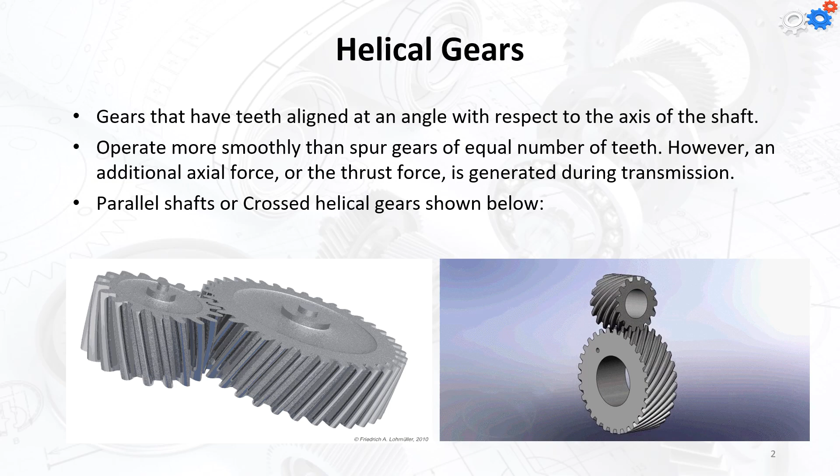So the helical gears are going to have a smooth and quiet operation due to the gradual tooth engagement. You remember that the straight teeth in the spur gear are going to have a complete engagement every time, and that's what actually causes the noise at high speed. The gradual engagement of the teeth is going to lead to a smoother operation.

The spur gears are limited at high speed due to the impact, while the helical gears are good for speeds in excess of 5,000 feet per minute. They can withstand a large capacity of up to 30,000 horsepower. More tooth engagement allows for greater power transmission for a given gear size. Parallel to perpendicular shaft arrangement are possible.

The disadvantages: they are more expensive because the manufacturing process is going to be more expensive. And the resulting axial thrust component is also one of the disadvantages because this will affect the shaft, the shaft design and the shaft material property.

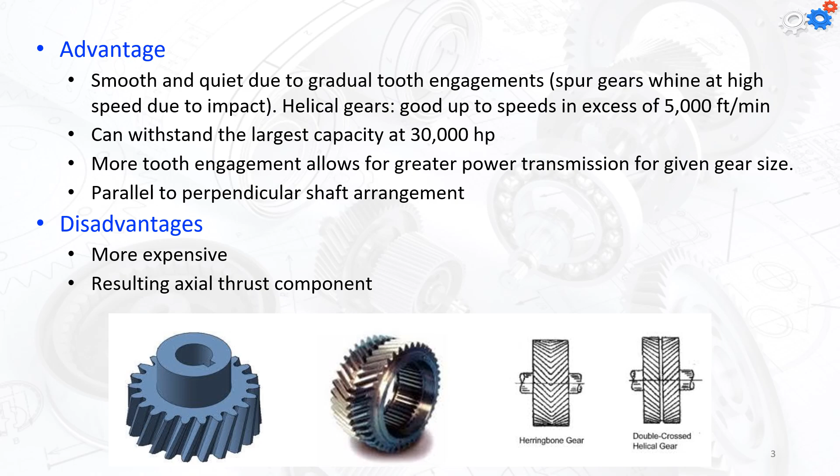So we remember that in the spur gear we have what we call phi, which is the pressure angle. Now here we're going to have an additional angle, the helix angle. The helix angle is typically in the range of 15 degrees to 45 degrees. The circular pitch p is going to be equal to pi D divided by N as usual.

The normal circular pitch, Pn, is going to be equal to p multiplied by the cosine of the helix angle. The diametral pitch is N over D. The normal diametral pitch is going to be Pd divided by the cosine of the helix angle, and the axial pitch is going to be equal to p divided by the tangent of the helix angle.

So you can see now from this diagram, we're going to have the radial force, the tangential force, the axial force, and the normal force is going to be the sum of all. So the axial force here is actually an advantage and disadvantage at the same time.

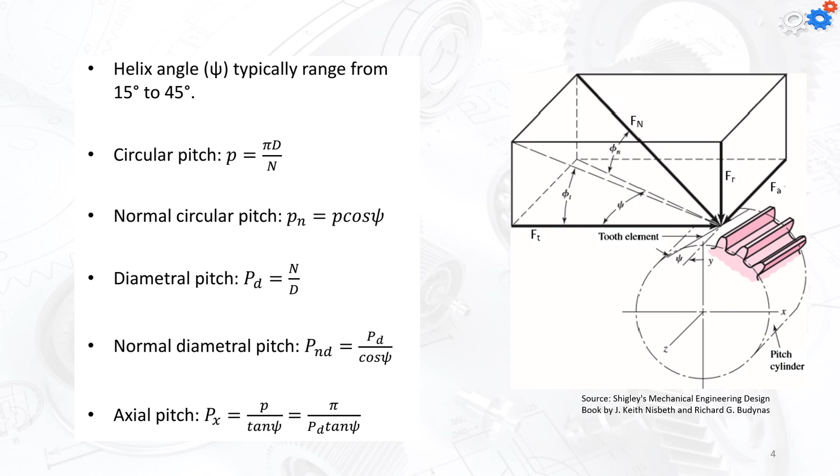So we will go through the design procedure for the helical gears. Once again, we are going to go through the different equations, and then we're going to summarize that in a step-by-step procedure that you can follow to solve the example for this topic. So let's discuss the forces applied in the helical gears.

We have Wn, which is going to be the true normal force that acts perpendicular to the face of the tooth in the plane normal to the surface of that tooth. So what we mean by that: that's the face of the teeth, and you can see that the normal plane is going to be this one, and the force Wn is going to be perpendicular to the face of the tooth in that plane. So this is the normal plane, this is the normal force.

So what you can see is that it is going to be inclined by the normal pressure angle, phi n, and then we have the helix angle. The helix angle is the angle between the two planes here, the normal plane and the force, and we have the tangential force.

Now the normal pressure angle is phi n, the transverse pressure angle is phi t, and the helix angle is given here. Now for the helical gears, the helix angle and one of the other two are going to be specified. The third angle can be computed from the equation: tangent of phi n is equal to tangent of phi t, the transverse pressure angle, multiplied by the cosine of the helix angle.

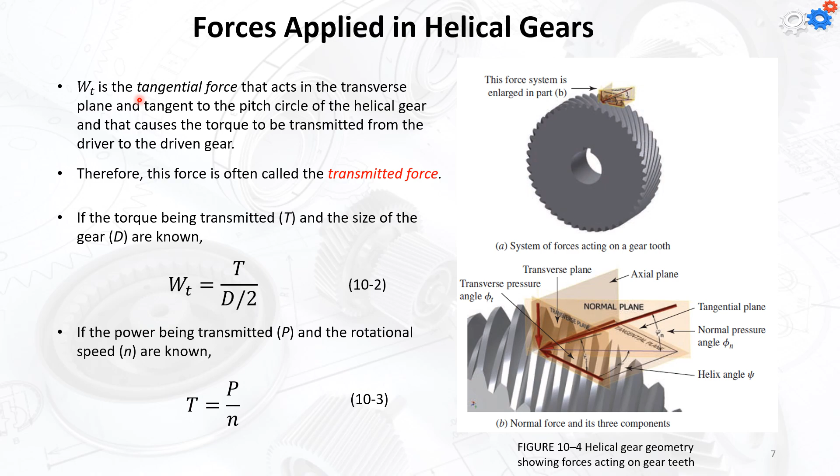So we can summarize the power, torque, and the forces relation. The box to the left is going to be for the US units system, and the one to the right is going to be the power, torque, and the forces for the SI metric unit system. So for the US unit system, or the IP system, we bring the concept and the equations from section 9.3 in the book developed for the spur gears and apply them for the helical gears. And these are going to be unit specific equations.

So when the power P is expressed in horsepower, the rotational speed is going to be in RPM, and the diameter D is going to be in inches. So the torque is going to be equal to 63,000 multiplied by the power in horsepower divided by the N in revolutions per minute. And we're going to get the torque in pound-inch. The pitch line speed, or the Vt, is going to be pi d multiplied by N divided by 12, and this will be in feet per minute.

And the tangential force Wt is going to be 126,000 multiplied by the power divided by the RPM multiplied by the diameter. And finally, the Wt can also be found directly by multiplying 33,000 by the power divided by the Vt, because we simply replace pi dn divided by 12 with Vt in this equation, and we get a new factor for the multiplication.

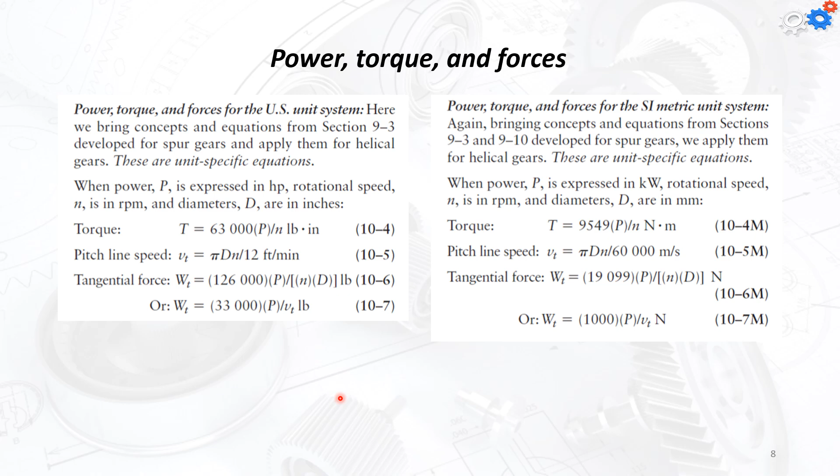And the tangential force is going to be 19,099 multiplied by the power in kilowatts divided by the RPM multiplied by the diameter in millimeters. Or, the same way, it is going to be equal to 1,000 multiplied by the kilowatts divided by the Vt in meters per second.

Now, after finding the tangential force and the normal force, we can use the transverse pressure angle, phi t, to find the radial force. So Wr is the radial force that acts toward the center of the gear perpendicular to the pitch circle and to the tangential force. It tends to push the two gears apart. Wr is equal to Wt multiplied by the tangent of phi t.

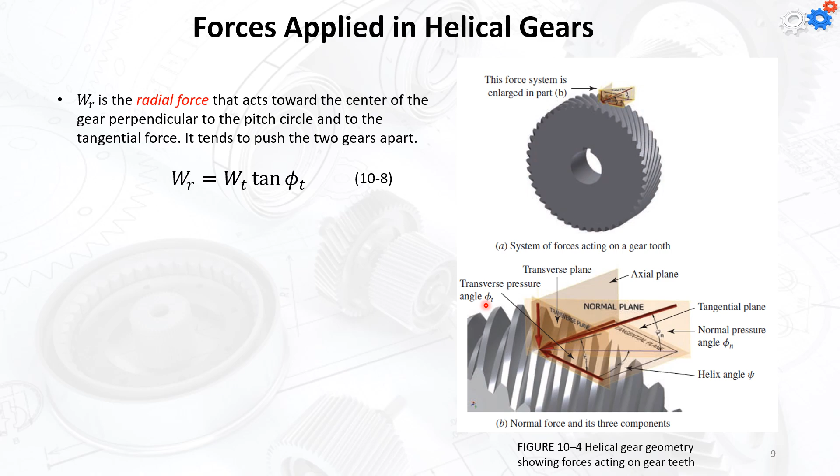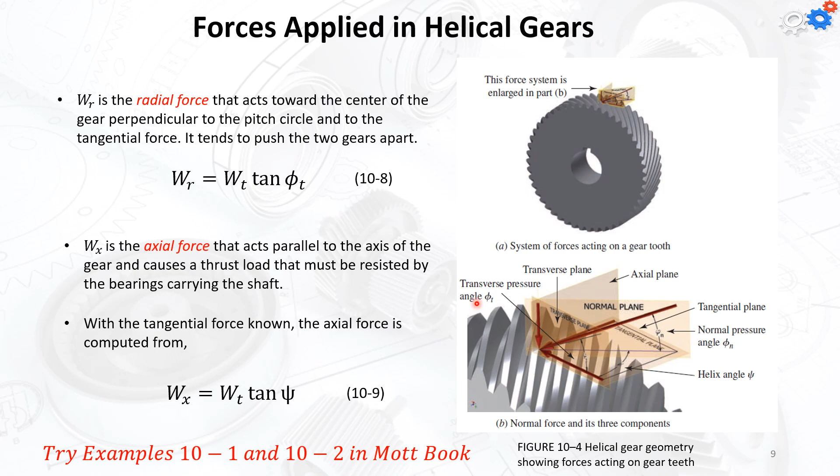Now, Wx is the axial force that acts parallel to the axis of the gear and causes the thrust load that must be resisted by the bearings carrying the shaft. With the tangential force known, the axial force can be computed from the equation Wx is equal to Wt multiplied by the tangent of the helix angle. You can try example 10.1 and 10.2 in the Mott book as an exercise for finding the forces by using the equations that we listed here.

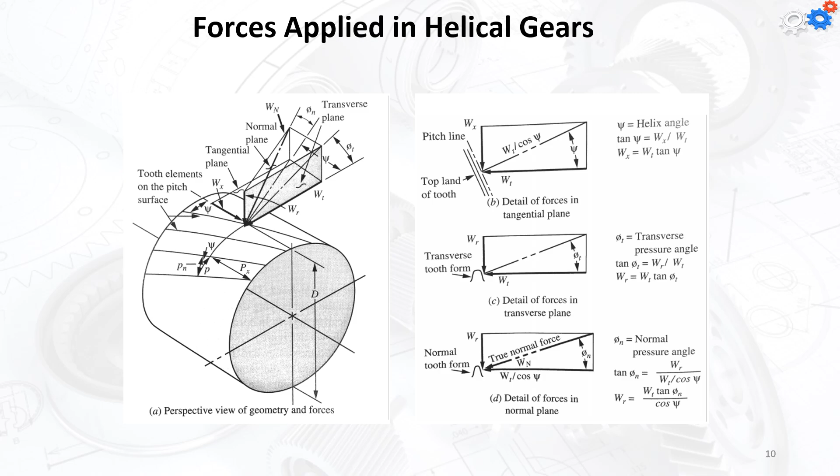So now we are ready to go for the next stage, which is going to be the design procedure. Before that, we are going to continue to find the parameters required for the design procedure, which is mainly going to be about finding the stresses exerted on the gear. So for helical gear design, everything is essentially going to be the same as what we have for the spur gear. The fundamental difference is going to be using the J and the I factors.

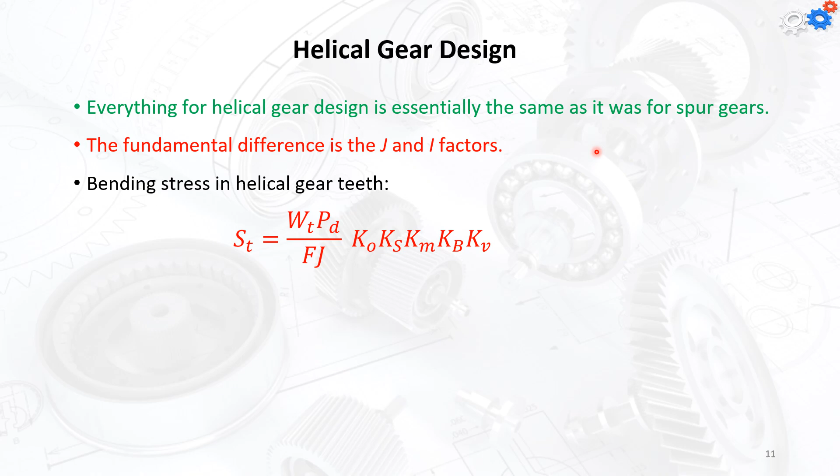The bending stress in the helical gear teeth is going to have a similar equation to the one we had earlier. So it's going to be Wt multiplied by Pd divided by F J, you remember it was I earlier, multiplied by the factors Ko, Ks, Km, Kb, and Kv. The overload, the size, the material, and other stuff. So Ko is the overload factor for the bending stress.

Ks is going to be the size factor for the bending stress from table 9.2. Km is the load distribution factor for the bending strength. Kb is going to be the rim thickness factor. And Kv is going to be the dynamic factor for the bending strength. And J is going to be the geometry factor, and this can be found from figure 10.5 and 10.7, which we are going to present to you soon.

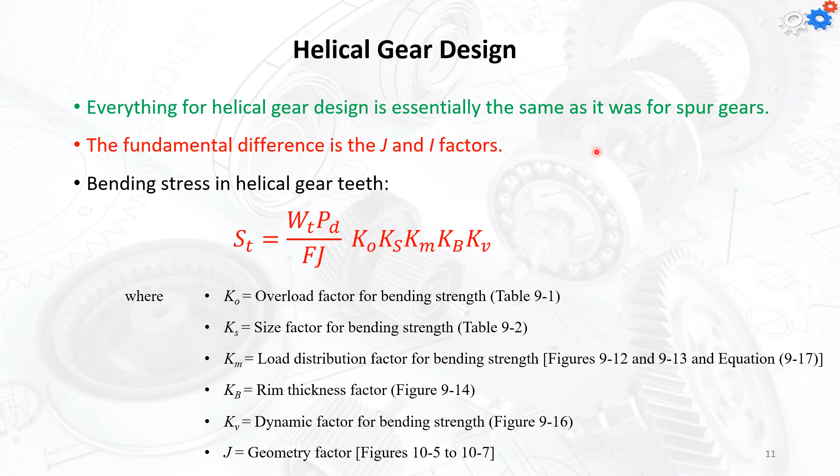So again, we have the number of the teeth in the mating elements and the helix angle. Once again, we make the intersection, then we can find the value for the K factor or the modifying factor. In case the phi n, or the normal pressure angle, is equal to 20 degrees, we can use figure 10.6 and the same procedure to locate the value for the geometry factor J and for the modifying factor K.

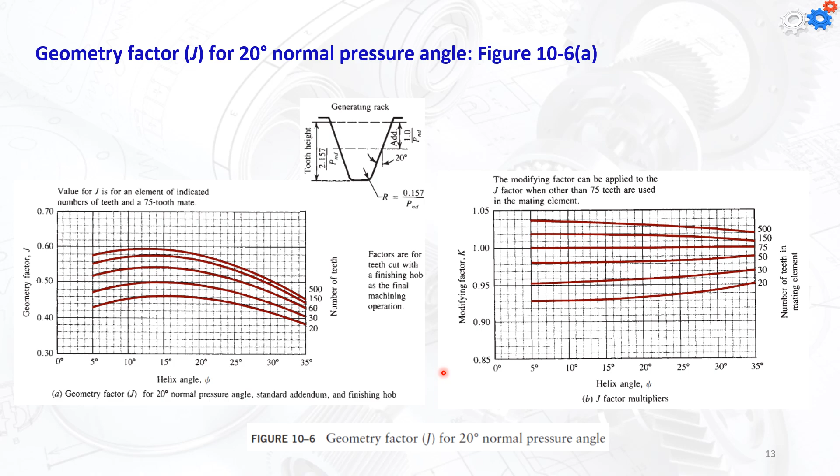Again, for the pitting resistance, we need to find the I value, which is the geometry factor for pitting resistance. The equation for the contact stress number, or SC number, is the same equation that we learned earlier with a slight difference. We have F, d_P, I at the denominator, we have WT, KO, KS, KM, KV, everything to the power of 0.5 multiplied by CP. The other terms follow the usual notation defined for spur gears.

And I now is the geometry factor for the pitting resistance that we can get from the graphs. The geometry factor for pitting resistance I for helical gears with a 20-degree normal pressure angle and standard addendum is listed in table 10.1, while for helical gears with a 25-degree normal pressure angle and standard addendum it is listed in table 10.2.

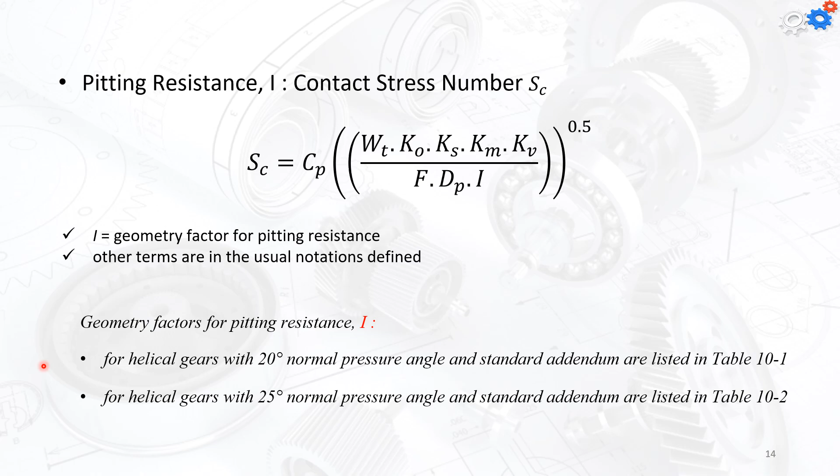So this is table 10.1. That's for the helix angle of 15 degrees, and this for the helix angle of 25 degrees. And here we can see that phi n is 20 degrees. So what we have here is the gear teeth and the pinion teeth, and we can do the matching. So 17 and 17 is going to be 0.124; it is better to have the same teeth number for both. For example, I'm going to take 35 against 17.

I can get 26 against 26, 26 against 21, 26 against 17. For 135, it can match with 17, 21, 26, 35, and 55. So this is the value I'm going to get for I. We're going to use it in the equation that we saw on the previous page.

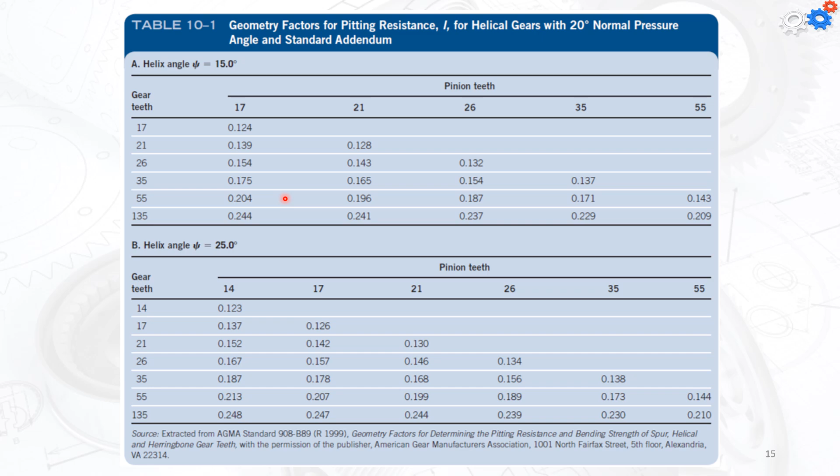Now, let's jump to the next. On this page, we find table 10.2, which is the geometry factor for the pitting resistance I for helical gears with phi n equal to 25 degrees. And once again, that's for the helix angle of 15, and this for the helix angle of 25 degrees.

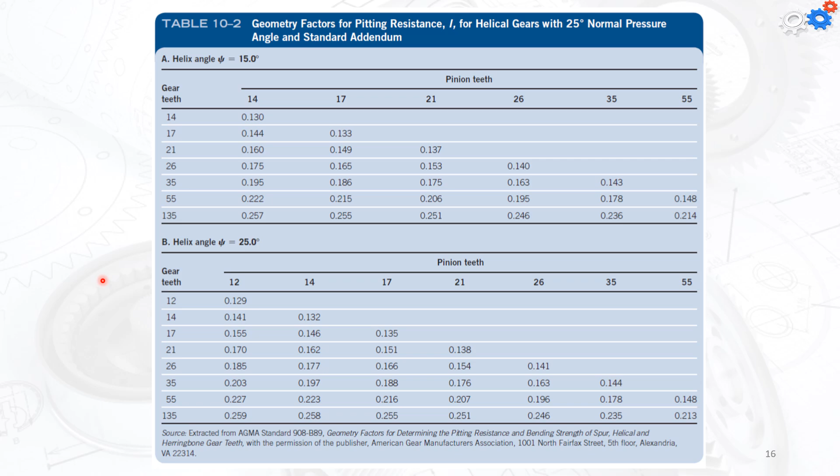So the steps of the helical gear design have been summarized. Step number 1 is to specify the normal diametral pitch, the pinion teeth number, the helix angle, and the normal pressure angle. We need to compute the transverse diametral pitch, the axial pitch, the transverse pressure angle, and the pitch diameter. Then we choose the face width, giving at least 2 axial pitches to ensure that true helical action is achieved.

Step number 4, compute the pitch line speed V and the transmitted load. Step number 5, compute the number of the teeth in the gear. Step number 6, determine the K values. Step number 7 is determine the bending stress, the contact stress, and the pitting resistance, determine which is the governing stress, and select the appropriate materials to avoid failure.

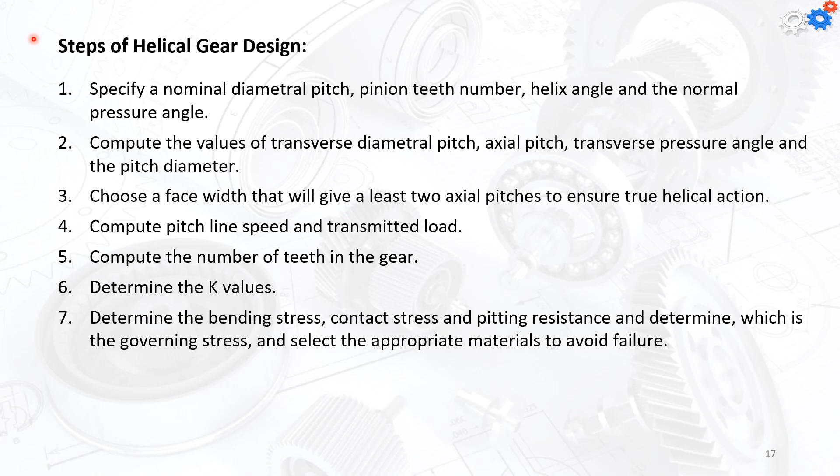So the helical gear design example is about a pair of helical gears for a milling machine drive. It is going to transmit 48.47 kilowatts or 65 horsepower with a pinion speed of 3,450 RPM and a gear speed of 1,100 RPM. The power is from an electrical motor. We need to design the gears. So we are given that the driver is an electrical motor and the driven is a milling machine.

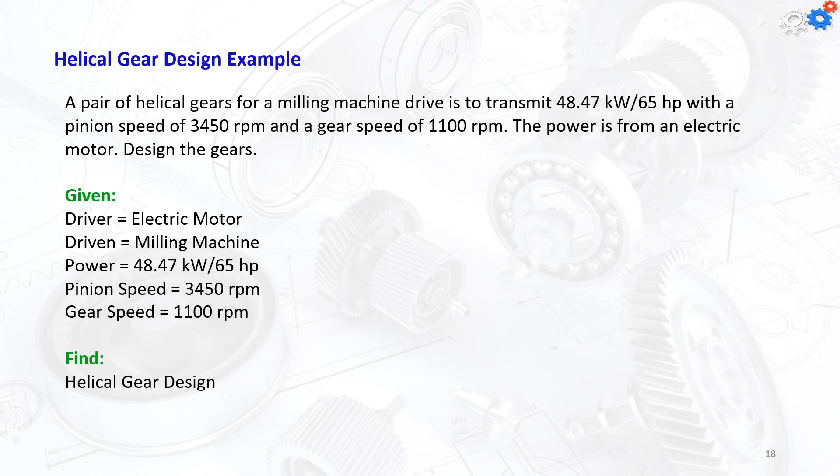Of course, the type of the driver and the type of the driven will help me find the value for KO, which is the overload factor. We have the power of 48.47 kilowatts. The pinion speed is given, the gear speed is given. Find the helical gear design based on this information. So next is going to be the bevel gears.